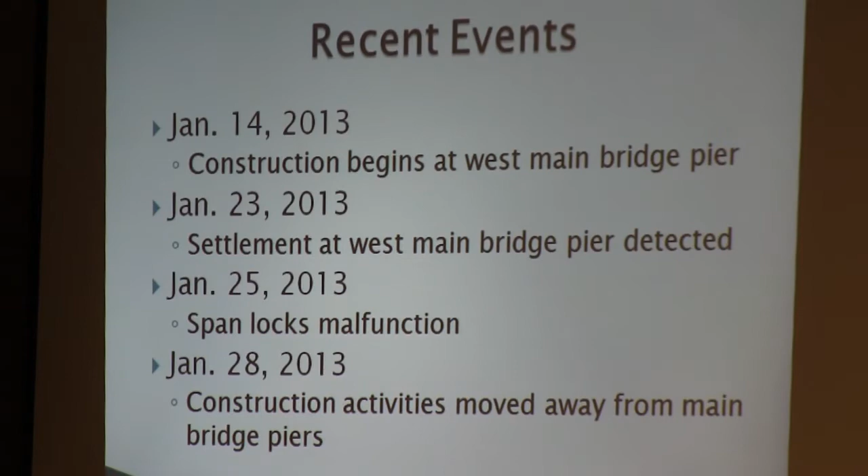What we then did was move all construction away from the main bascule piers, the ones with the leaves that open up and close. Those are what we call the bascule piers.

This is what I'm talking about. When we started having settlement on the bridge, we asked our structural engineers, who know a lot about this, to analyze and tell us what would be the critical settlement on a member of the bridge, meaning what would be the critical settlement on this member here. What came back is that 2 inches would be critical. We're currently at an inch and 5/8.

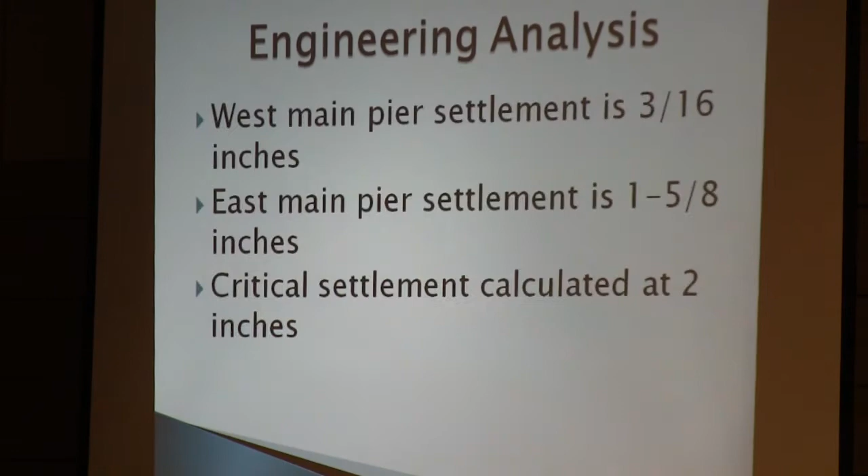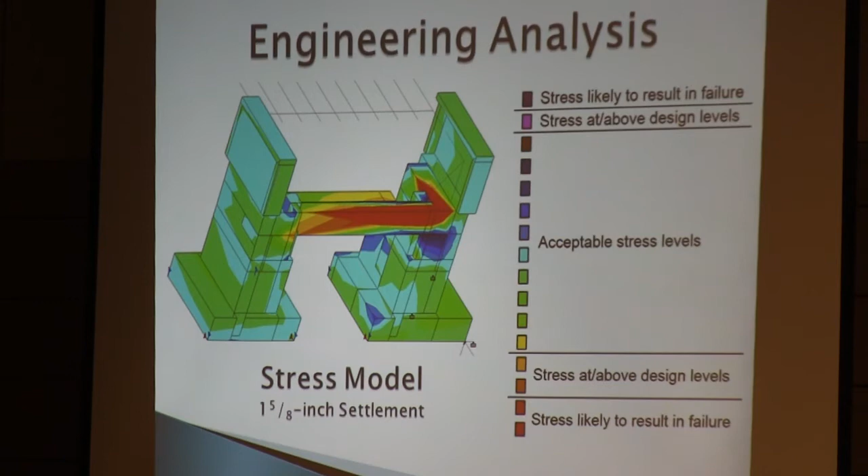That's one foundation structure, and that's the other foundation structure I showed you. This is the member that ties them together, and as you can see, this is red - an area that indicates stresses in this member are more likely to result in failure. As you can see in the legend, this is stress likely that will result in failure. That's where we're currently at.

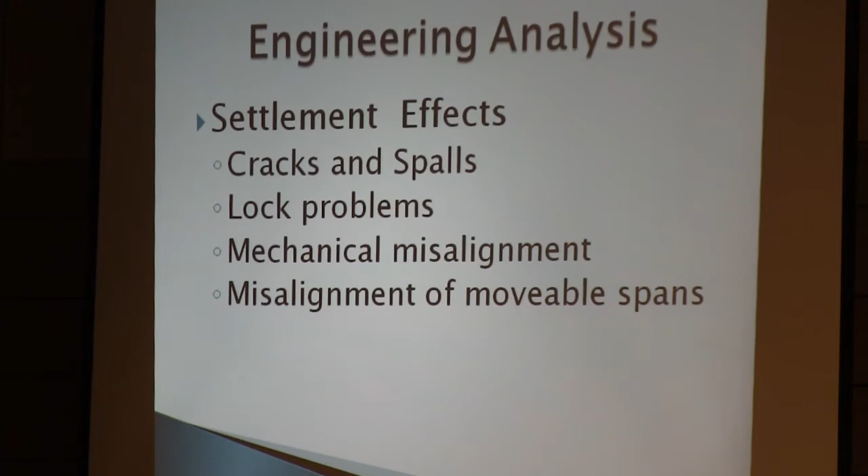What are some of the effects we will see with settlement in the bridge? We'll see cracking - the structure will crack, and that will indicate where some of those stresses are. We'll have lock problems, the locks will bind up. We'll have mechanical misalignment - the gears and things in the bridge will not work as well as they should. There will be misalignment of the movable spans - they don't line up vertically or horizontally as they should, because there are two leaves.

As you know, the bridge opens with two leaves, and when they don't align, that's what results. So having said that, I'll show you what we've seen out there - what to look for, the issues and visual impacts we'll see based on all these stresses in the bridge, and what some of those impacts are that we're seeing now.

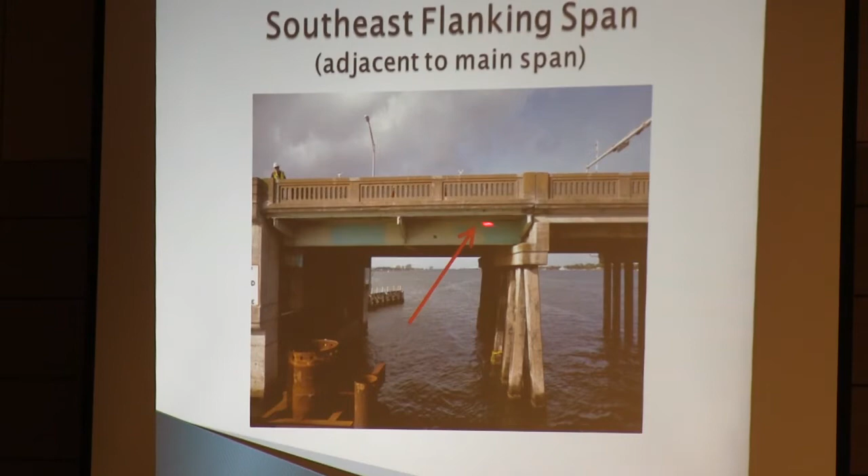What I'm going to show you is this: up here we're starting to see a lot of cracking, I have an arrow showing it there, and more details of it here. As you can see, sections of concrete are starting to fall out of this section, and the cracks are pretty wide right now.

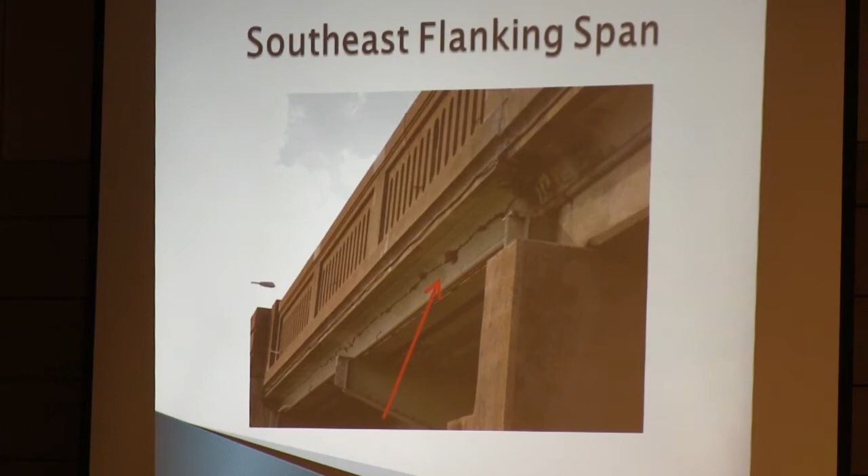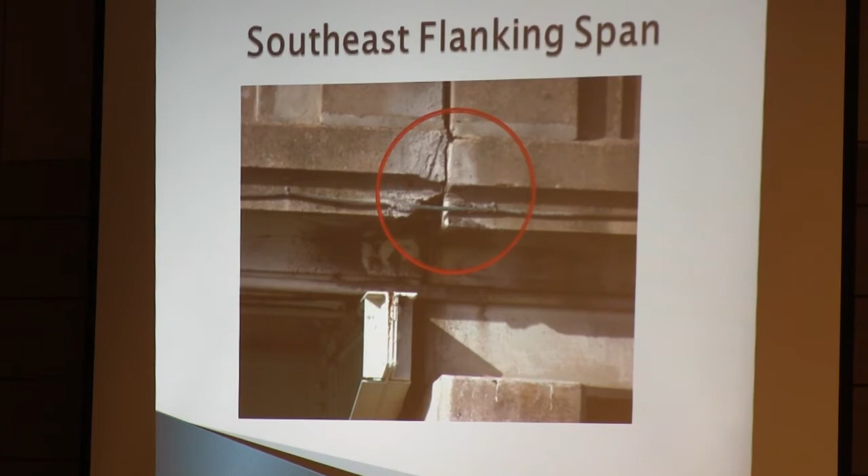This is another area on the bridge where you can see pieces of concrete have started to fall out. These are some of the cracks we're seeing underneath the span on that section of bridge. These are all due to settlement on the bridge.

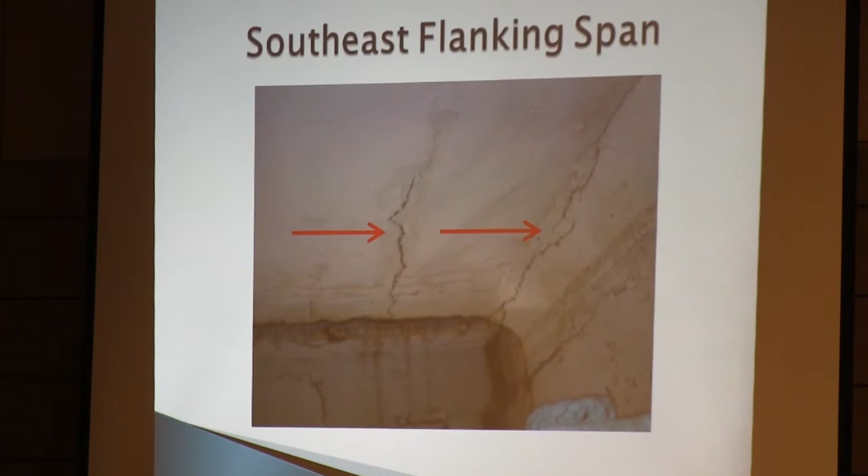This is the member I talked about, that you saw in the model with all those stresses in it. This is one foundation area, this is the second foundation for that east pier, and this is the member that tied them together - the one that had all those red lines in it. We show it over there.

This is what is happening to it right now. This is a key member - let me explain it to you. This foundation section here, that foundation column there, ties the two together to prevent movement so they can both move together, and it also prevents the structure from twisting.

What you see up here is just a counterweight on the bridge. It helps the bridge - think of a seesaw. This is the weight that helps pull down the bridge when we open it. This is the leaf of the bridge here, the section you drive on. So this comes down, when that goes up, this comes down. This member ties the two together to prevent this from twisting or moving away. This is a very key member.

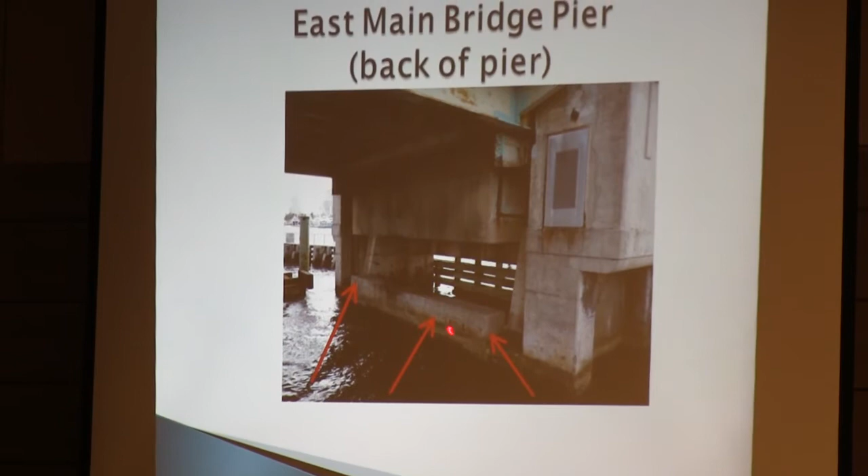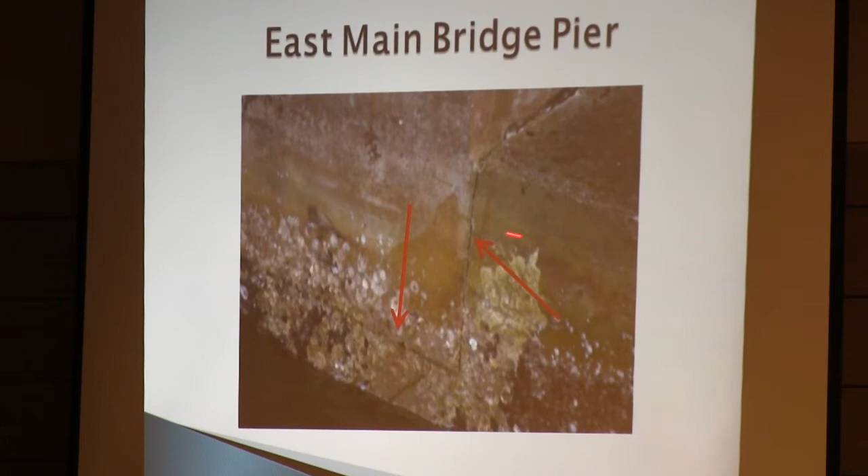That's the one you saw with all the red lines in it. This is what is happening to that member - it's starting to crack where the two come together, where the foundation ties together both sides. This is that same member with all these cracks starting to form in it. These are all the stresses starting to show up in the bridge.

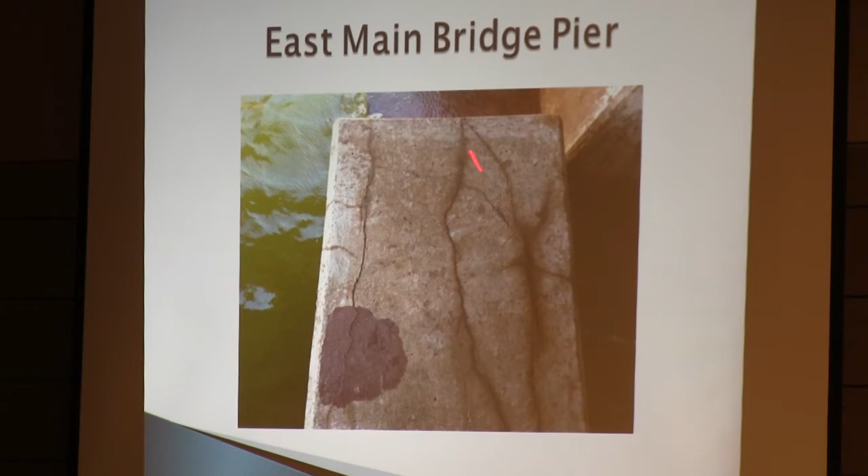Here's a quarter placed on one of those cracks, and it gives you an idea how wide they're starting to get.

When we move to the west side of the bridge and started construction on that side, this is what we call the flanking span. It's right adjacent to where the bascules are. Right here you can see where we started with some of the drill shaft work. That's where the new bridge will be, where you see this template.

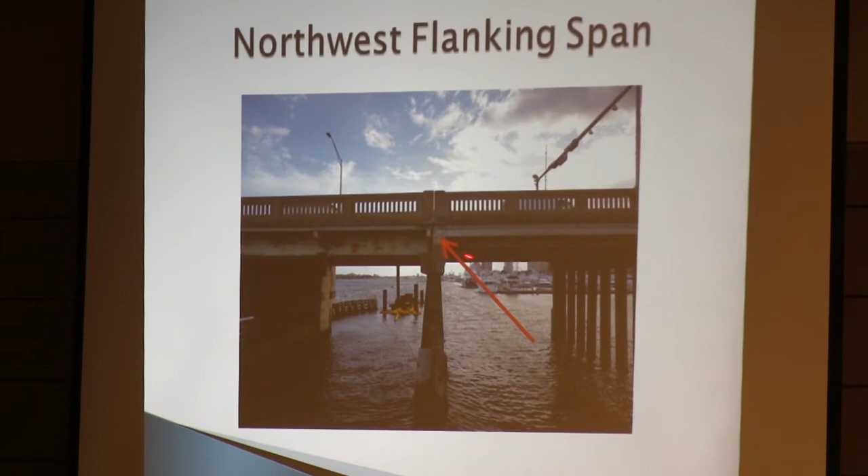This is what we started seeing here as well when this settled. These are some of the cracks that have started to form in this structure. These are some of the areas where we've seen concrete starting to break off and come out of the structure on that span we just looked at.

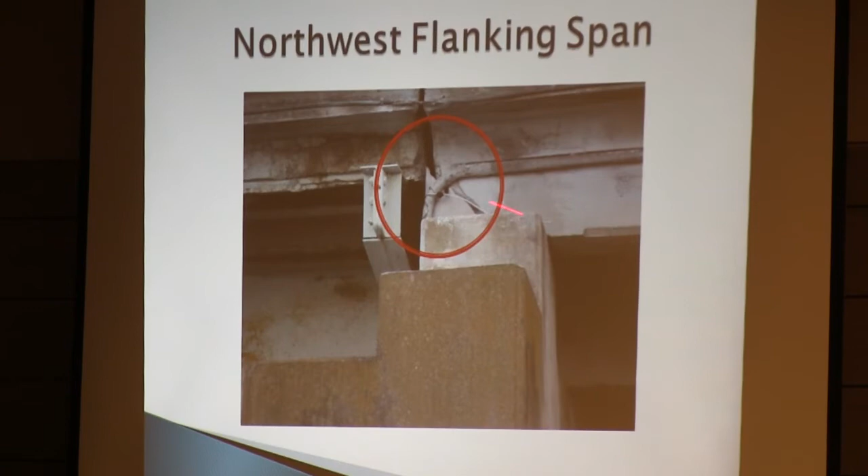These are some of the issues we're having with the span. You can start seeing some of the misalignment of the different sections. Let me get caught up here. Sorry, having to talk and look at the picture, can't see it sideways.

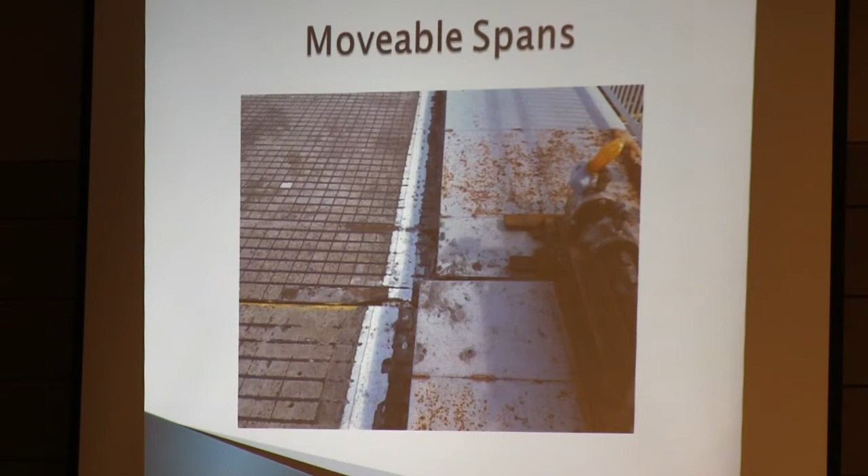I can guarantee you DOT doesn't lay stripes like this. This is where you can see the bridge has actually shifted, and the spans don't line up. These are the movable spans, they don't line up. That's the actual visual shift you're seeing that's going on when the structure settled.

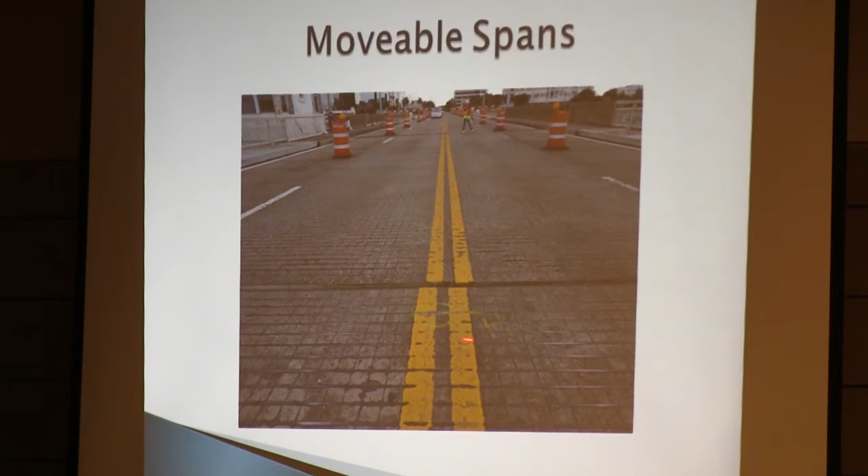This is some of the vertical misalignment that you're seeing. This is where one span meets the other span. This section goes up, as you can see.

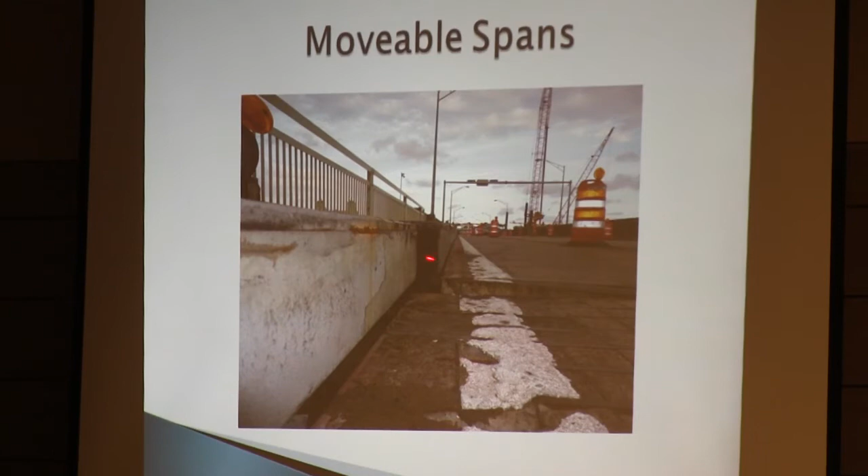Those are the lights that tell people to stop, we don't go down when they're on the bridge. This is where the edge of the sidewalk, both pieces should line up. They don't. You can see right through, both vertically and horizontally.

Here's another picture of that. You can see the gap here on the outside edge of that leaf. That is a vertical misalignment. That's also vertical and horizontal misalignment.

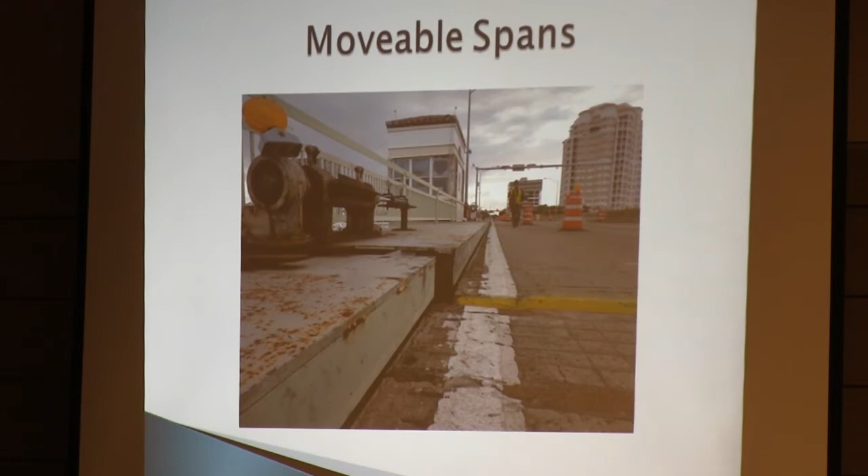That's all a result of the settling. We talked about how the analysis would tell us that these things would happen. We're actually physically seeing them in the field. This is a visual reminder of what's going on.

When we looked at all of that and what remains to be done, we haven't really started any bridge construction on this bridge. We have 108 drill shafts to put in. We've only put in 6, 2 adjacent to the structure. We've seen this much damage to the existing structure.

We recognize that this has become a safety issue. The minute we start to work out there again, we're going to have issues. The structure is going to settle.

We've looked at many alternatives. We've been asked to, and received suggestions as well from previous meetings, and we've looked into those. I'm sure there'll be a question on one of those, and we'll be happy to take those and answer them when we get there.

But we've analyzed all the options and we've run out of options. The only option that ensures public safety is full closure of the bridge, to accelerate the construction and get it done. This is the schedule we're looking at, and I'll give you an idea of what it is. This is where we'll be working on all the foundation work.

We'll have 2 crews out there, working both from the east side and the west side, from the town of Palm Beach side and the city of West Palm Beach side. We'll have 2 sets of crews operational, 2 sets of equipment out there, and we'll be working.

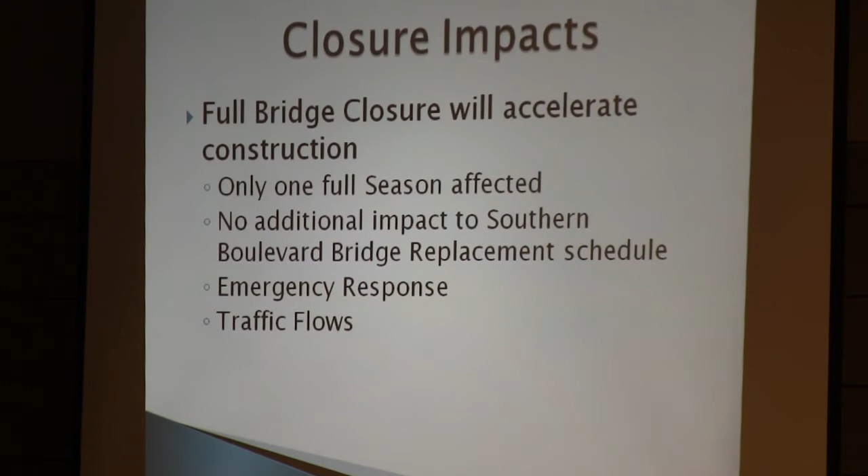I understand, we recognize that. We recognize that when we do a full closure, it's going to have a much greater effect on the community and businesses. So we have a plan that we've put in place. And to discuss that plan, what I'm going to do is ask Mark Plass, our traffic operations engineer for District 4, to come up and talk a little bit about that.

Taking any questions? We will after Mark's presentation. I will answer every question, but first I want to punch up a couple of things that Courtney said.

Pretty dramatic pictures. Is the bridge safe to drive on? Yes. Right now, it's safe. We would close it if it wasn't safe. We believe that. We're confident of that.

We also believe that it's not safe to drive on it when we reinitiate any kind of foundation work that creates a vibration. So we've suspended that kind of work. When we start that up again, we're going to have to close it.

Why do we believe we need a complete closure? Because when we close the bridge to start the pile driving again, we expect it to settle some more. If it reaches 2 inches instead of 1 5/8 inches, which is only a very small margin, our conclusion is at that point, it is not safe to drive on, even if we're not doing pile driving at that time.

It's no longer safe if we get just a little bit more settlement. So we're confident that with any more foundation work, it's going to settle more, and it's not going to reopen after we start the foundation work again.

We've also been asked, well, what if we're wrong? What if it stops settling and it's never going to settle again? Well, we'll find that out. When we start the pile driving, if the bridge doesn't move, then we'll change our plans. We've still got a bridge there that works.

The first thing we're doing is we've gone out and taken a preliminary look at all of the intersections and sections of roadway on the diversion routes in the town and the city. This is our best estimate of what these routes are going to be. We're going to learn more after the bridge closes.

The reason we did that is there are a number of intersections where we believe right off the bat we could make some changes to the signal operation, and other traffic controls, things like turn restrictions, to help the traffic flow more efficiently locally.

Some of these changes may become permanent. I think we're going to learn that some aspects of traffic control at intersections within the network that have existed for many years need to be revisited. This is the opportunity to make these intersections work more efficiently and simply leave it that way after the bridge opens.

So we've gone out and taken a preliminary look, my office has done this, at the intersections on the diversion routes. We're going to continue to look at those intersections with representatives of the town and the city, particularly the police departments with both of these entities, because they have a lot of intimate knowledge of traffic patterns, more than we know about this.

We want to take advantage of the knowledge that they have to better understand what's going on today and what changes we can make at the intersections themselves. So that's the first thing we've done.

The second thing we're planning to do is what I'm calling active traffic management. What this means is this: we have the network I've described. It's basically going to consist of Okeechobee, Southern Boulevard.

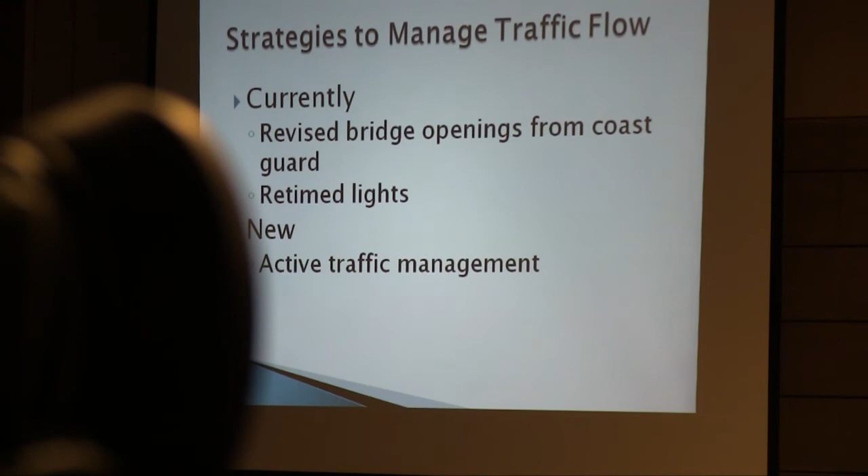Over time, what we're going to be doing is getting better and better at this. This is why when I started my remarks, I noted that really key to this is the fact that this is a partnership. This isn't the Department of Transportation working in a vacuum trying to manage this network. We have to take advantage of the local knowledge, which really exists at the town, the city, and the county levels, because these are the entities that experience the traffic and have probably the clearest understanding of the traffic patterns and where there are opportunities for us to make traffic move more efficiently.

One of the things I've talked to my staff about already, who's going to be involved in actually making this work, is that we're going to be open to any idea that people have to move traffic more efficiently.

We've had suggestions made to us, for example, on the possibility of taking Southern Boulevard over the bridge and making it one way in one direction during certain times of the day, one way in the opposite direction during other times. Ideas like that. We've also had a suggestion of looking at the Okeechobee Bridge and having the possibility of not allowing left turns at certain times of the day.

Nothing is off the table at this point as far as we're concerned. What I've told my staff is that people who regularly drive this network know more about it than I do - they probably know more about it than my staff does. I think there's going to be a lot of good ideas that come out of this. We want to make ourselves available to accept these ideas, to vet them, and the ones that make sense, that are going to help, that are supported by the town and/or the city depending on where they are, we're going to implement as part of this traffic management system.

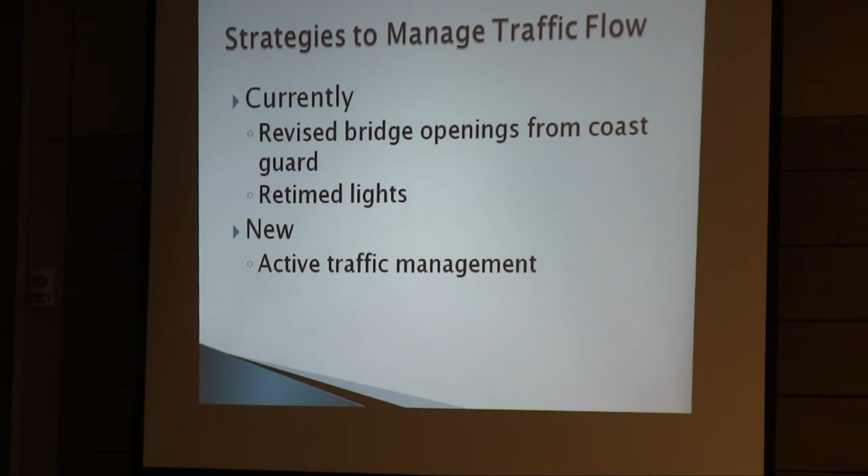If there's incidents in the network that we don't want them driving in toward because it's going to create additional congestion, we're going to notify them of that before they leave I-95, and ideally give them alternate routes if there are, or at least let them know if you go this way, there's more delay than if you go a different way. Now, our goal is to get phase one operational by the end of this month.

And we already have staff in the TMC that's been training on how to manage arterial traffic. They've had training in the cameras we're using. They've had training in the systems we're going to be using. And now we're going to focus entirely on this network with this staff. So we believe by the end of this month we'll be up and running with staff in the TMC to monitor this network and cameras deployed to help them do that.

In addition to that, we're going to start working immediately with our partner agencies to begin to establish what we call the operational protocols. How are we going to manage this network? What are the chains of command? What are the rules we're going to use? How are we going to analyze new ideas that people come to us with that are going to improve the traffic flow in the network?

We've got law enforcement, the fire departments, emergency responders, again, the railroad, the Coast Guard, and so on. And so it's important for us to be able to develop the protocols, the rules, if you will, by which we're going to manage this network, because there's a lot of different entities involved in doing this. Starting this month, or starting in March, we're going to begin doing that. And we're going to continue to refine these protocols throughout the duration of the bridge closure. We're going to get better and better at doing this, working together as a partnership.

By the end of March, our plan is monitors in the TMC, the initial deployment of cameras in the network. As we learn more about the network from our partners, we will likely deploy other camera equipment at other critical intersections and sections of the network until we have an optimal deployment where we can see what we need to see when we need to see it.

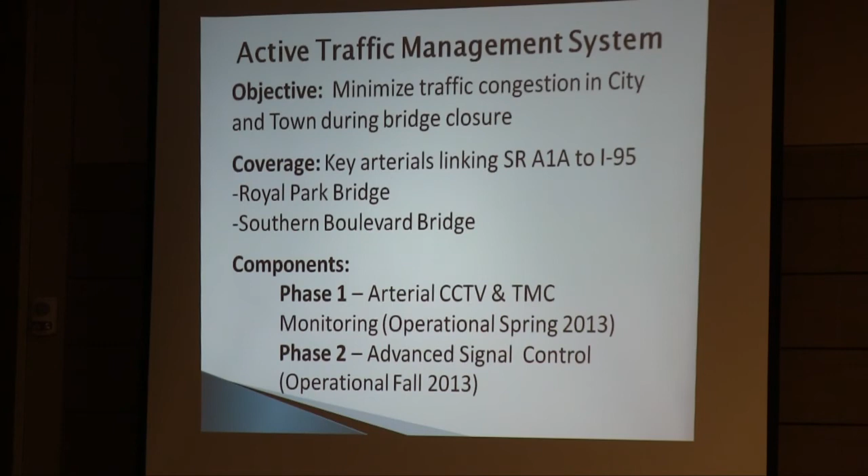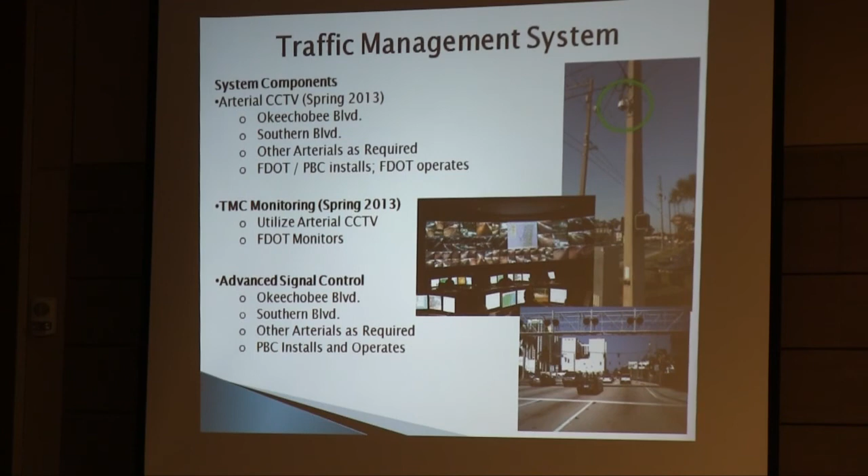Okay, so this again is a synopsis that shows some pictures. You can see roughly what these cameras look like. The camera's got the green circle around it. The Traffic Management Center, that's not exactly what Palm Beach County Center looks like, but it's pretty close. It's a building, it's a network.

It uses the Traffic Management Center's capabilities to reach out to the partners to better coordinate incidents, or the response to incidents, coordinate the deployment of law enforcement officers to manually control intersections, contact the railroad in the event there's issues there, the Coast Guard in the event there's issues there, the contractor who's doing the bridge work. You name it, we can contact them from there. This is where the partnership has, this is the partnership's brain, if you will.

The system that I've noted, which is the cameras, the advanced controller equipment, this can be reconfigured. It can be rearranged, relocated to other intersections if need be, very easily. It can be expanded if need be very easily during the course of this process.

And I think it's important to recognize, and I've said this a couple of times, and I want to stress it again, that this is going to be a learning process. I'm not going to tell you that right out of the box on day one we're going to be operating this network optimally. Because of the partnership, we're going to learn how to do it better and better. We're going to get feedback from the partners, feedback from the public. We're going to value that feedback because it's going to help us get better faster at doing this. And we're going to report back to everyone on how well we're doing based on the feedback we're getting. So the partnership is really key to the success of all of this, I believe.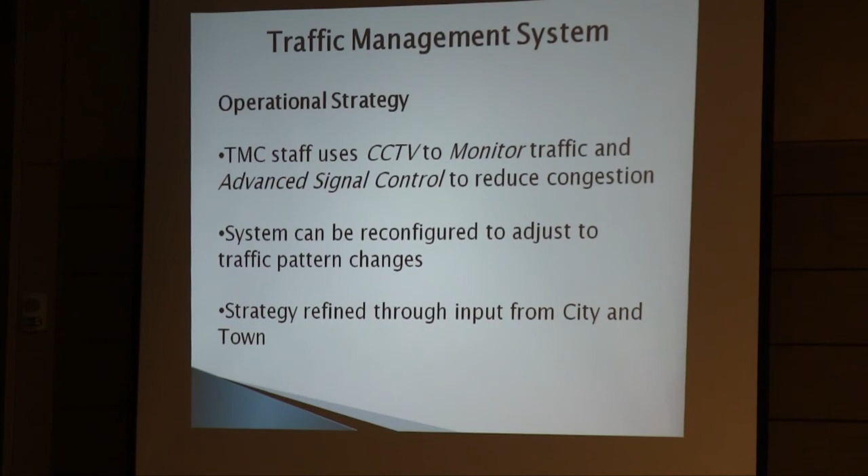So I guess just to wrap up here, we have a challenge here to manage this traffic. There's been, as I noted, about a 40% reduction in capacity just in the links between the peninsula and the mainland. We've got a defined network that we can manage. We can use the technology. We can use protocols that we establish to help us use the technology. We can take advantage of the partnership that we have with the town, the city, the county, other entities. We can take advantage of the ideas that our partners have to better refine this network to make it work as best as possible during this period of time.

And I think what we might find is that at the end of the 14-month period, when the new bridge is open, we might find that some or all of what we've deployed we want to leave permanently, because it's worked well enough that we want to make it a permanent component of how traffic is managed in the town and the city. So that concludes my remarks. Thank you very much.